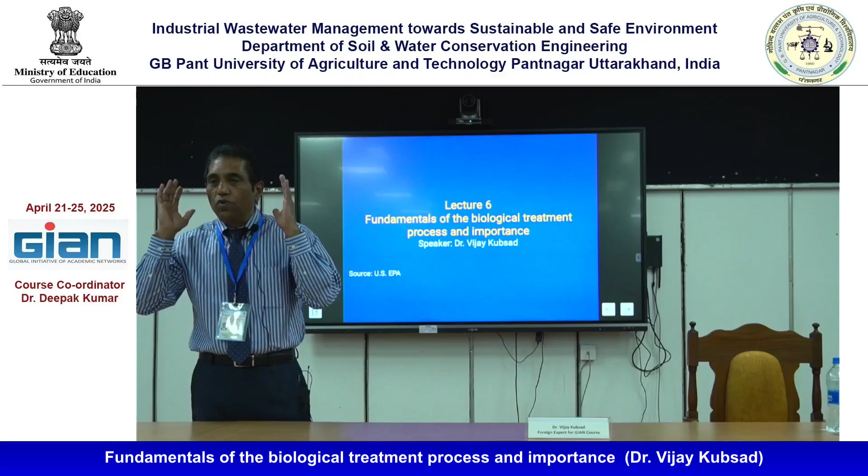You work with different groups of people: consultants, regulators, industry, public participation. See how many components you are working with together. That is how this course has been built. Whole, then part by part we are going, so that you will have a complete understanding of what you have studied, how it is done in all directions. That is the intent.

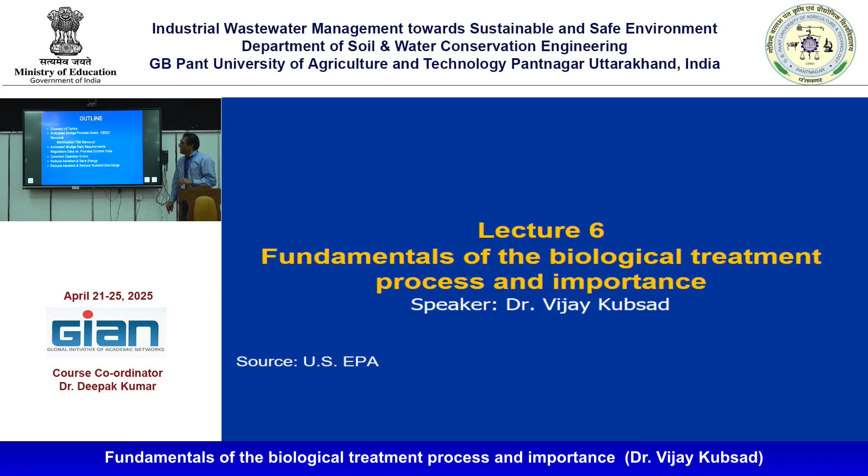Earlier I used to mention biological treatment. That is what we are studying: fundamentals of the biological treatment process and its importance. Outline. I have given you the glossary terms. Please read them. They are in soft form. I wanted to give you hard copies, but we have to save some trees also. If you read, that is useful. It should not just remain in your computer, right?

Those are the terms in the field of wastewater treatment, in the field of environment. You should know what they mean. If I say BOD, you should understand what it is. That is the fundamentals. That is why I say BOD, but sometimes I explain. But there are several other terms also.

There is daily discharge, monitoring, what is pH, what is nitrate, what is nitrogen, what is ammonia, what are the limits, what do you mean by limit, what do you mean by a wastewater treatment plant, what are the pollutants of concern, everything is there. There may be some more, but the major ones are there, so we read that. So the activated sludge process,

carbonaceous BOD removal, nitrification, TSS removal, activated sludge data requirements, regulatory data, process control data, common operator errors. Operators are very important, the people who manage that system. That is why they have to be certified. Just by experience, they have been doing some things for many years.

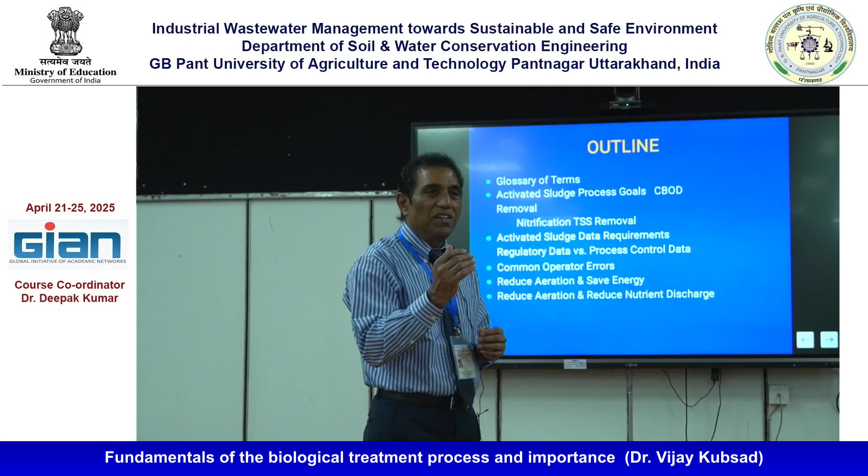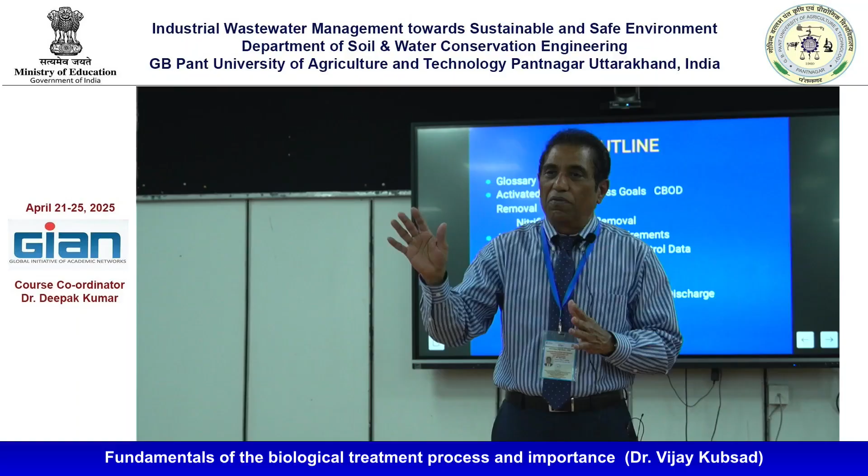In the design, you will assume certain parameters, but not exactly the same. There may be a little variation. That is why you have to make sure that things are working in the field. It needs a little tuning. So don't believe that this is different and that is different and just walk away from it. No, it will work. So you should make sure that these things are working in the field.

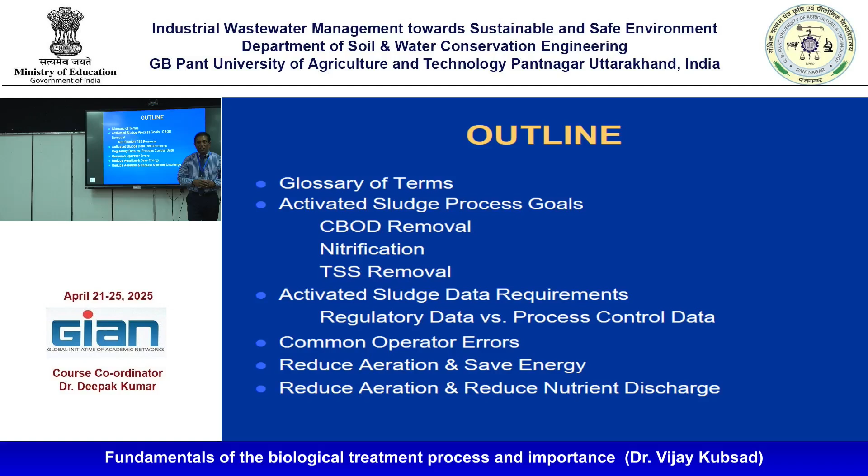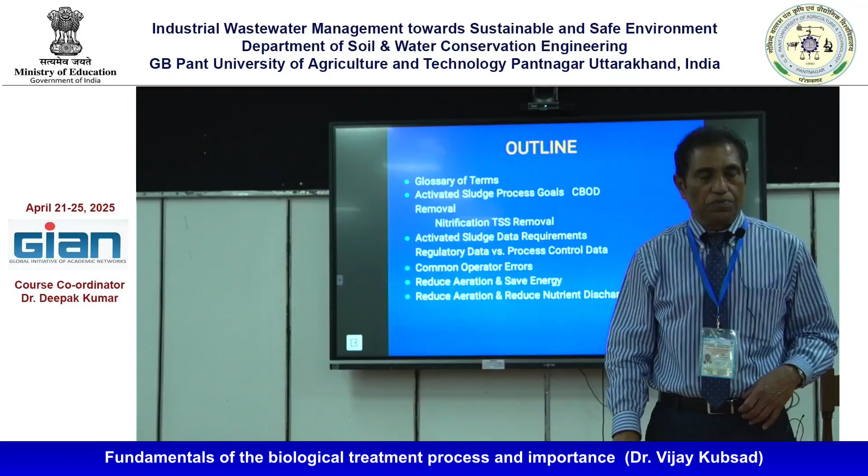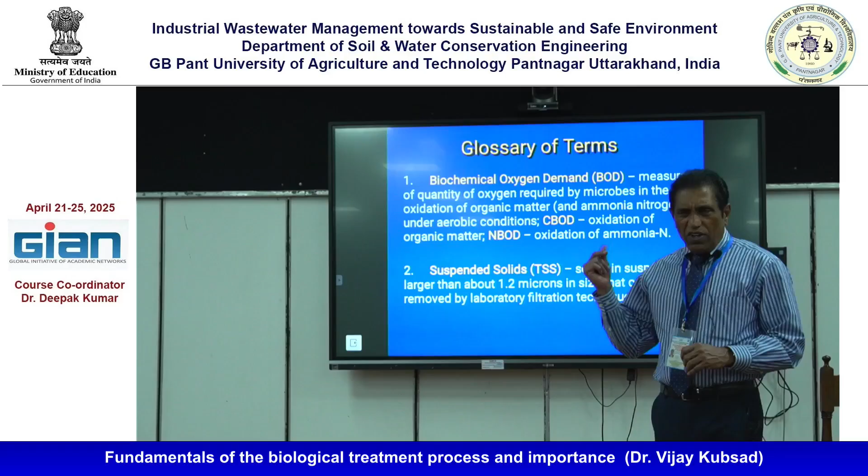If you know this, you can save energy. Energy is very important. A lot of energy is required in the treatment plants. We will come across different types of biological treatment systems. We use a lot of energy in the treatment system. So I will go a little bit quickly through the glossary terms commonly used in biological treatment. Why are biological treatment systems still so popular today?

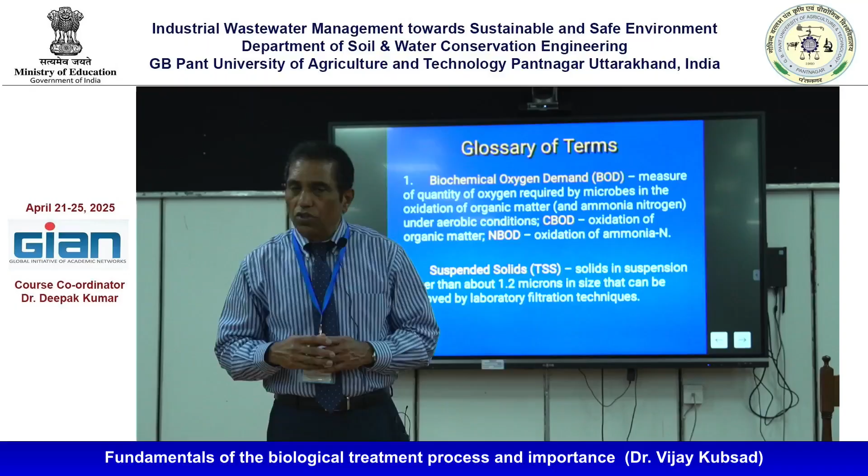Because it is done by bacteria, microorganisms, right? Microorganisms do a very great job for people. They convert unstable organic compounds into stable compounds, into water and carbon dioxide, reducing the organic loading, right? So they do an important job. So you should know what organic matter is, how much is reduced, what aerobic treatment is, what anaerobic treatment is. I have given it in the glossary. I just wanted to brief a little bit about that.

BOD is the quantity of oxygen required by microbes in the oxidation of organic matter under aerobic conditions. Aerobic means in the presence of oxygen, anaerobic in the absence of oxygen. What is the difference?

Detention times are different, based on oxygen supply. There are bacteria which are more efficient in aerobic conditions, and there are bacteria who can work in the absence of oxygen also. That is what your digesters are.

So then suspended solids - solids in suspension larger than about 1.2 microns in size that can be removed by laboratory filtration techniques.

If you are telling someone BOD is this, suspended solids are this, how will you define it for a third person? That is why you should have understanding for yourself when you are making a statement.

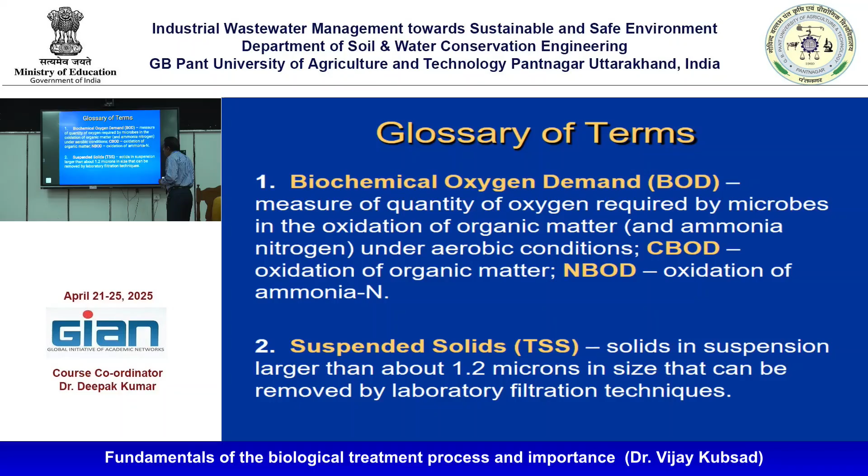Then biomass, living biological matter - I'll go a little quick on that. Activated sludge process is a biological wastewater treatment process in which a mixture of wastewater and activated sludge. Why is it called active?

Because what you do in the activated sludge - we will go further, you will understand much better - when the sludge is there, 2%, 3% of the sludge, 10% of the sludge is again recycled. You want to keep it active sludge. That is why it is called activated sludge process.

Because what happens in the aeration tank, organic matter is converted into stable compounds. And in the next clarifier, these bacteria are removed as suspended solids. Then part of that you recirculate to the oxidation, to the system, because they are removed as suspended solids.

See how important work they do, in a fraction of a second, right?

So activated sludge is aerated in the reactor basin, in the aeration tank. Biomass is settled in the final clarifier, with most biomass returned to the aeration tank, while some biomass is wasted.

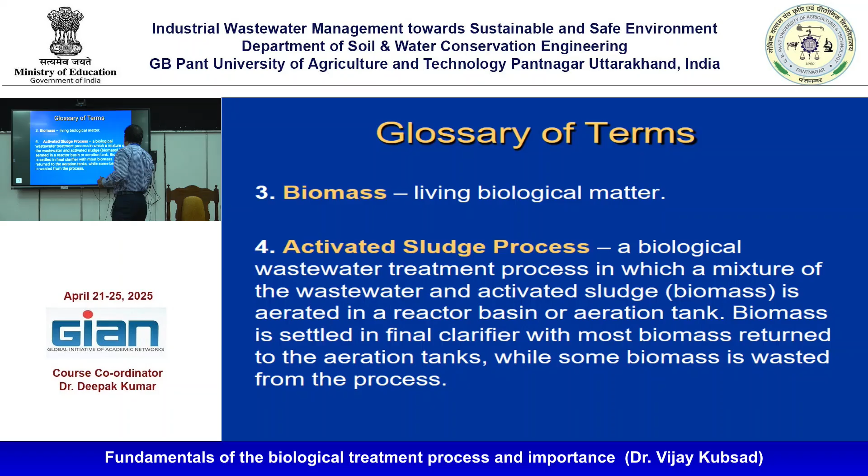Then return activated sludge - settled activated sludge that is returned to mix with the raw or primary settled waste. Then waste activated sludge - the quantity of microbial solids that has to be wasted from the system at the rate it is produced, same as the excess biomass.

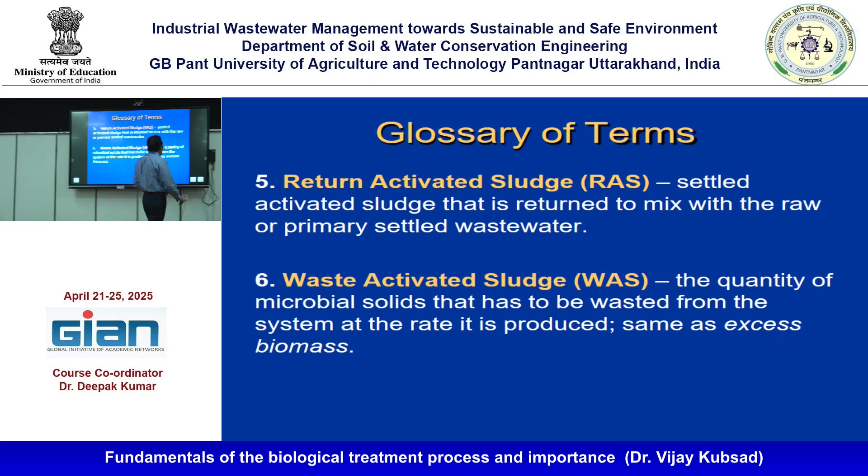Okay, so we are entering into the treatment system. I'm giving some basic understanding about the terms frequently used in the system.

Sludge age - the average time the microbial cell remains in activated sludge, same as mean cell residence time and solid retention time. Bacteria also has an age, right? That is why you need recirculation.

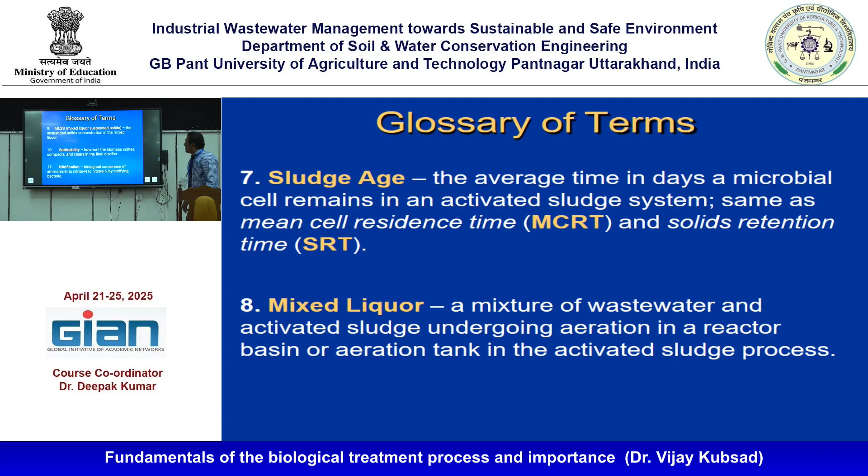Mixed liquor - a mixture of wastewater and activated sludge undergoing aeration in the reactor basin, aeration tank, in activated sludge process. MLSS, mixed liquor suspended solids - the suspended solids concentration in the mixed liquor.

Settleability - how well the biomass settles, compacts, clears in the final clarifier. That is important, it has to be settled. That is why you give sufficient retention time so that they can settle.

Nitrification - biological conversion of ammonia nitrogen to nitrite by nitrifying bacteria. Nitrite is unstable, it is converted into nitrate. The reaction is done. If I say there is no organic compound, what does that mean?

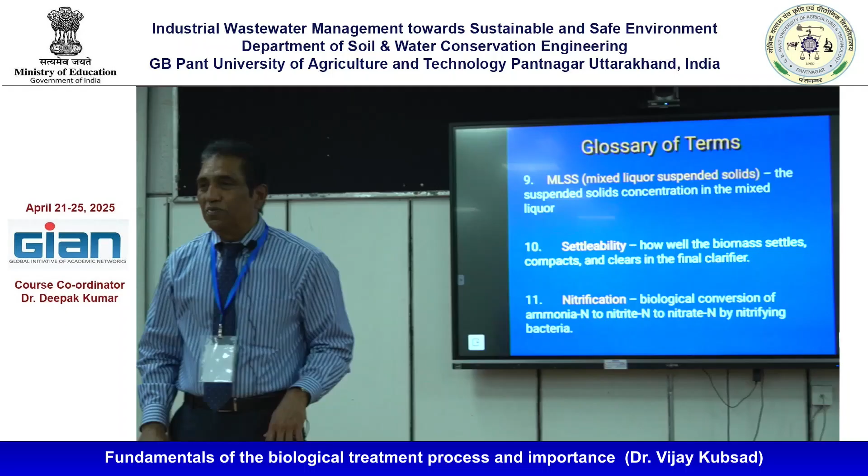The reaction starts as soon as the wastewater comes out of your residence, because it has bacteria. When all the organic matter is converted into water and carbon dioxide, the reaction stops. That's why when you go near a wastewater treatment plant, it has some odor.

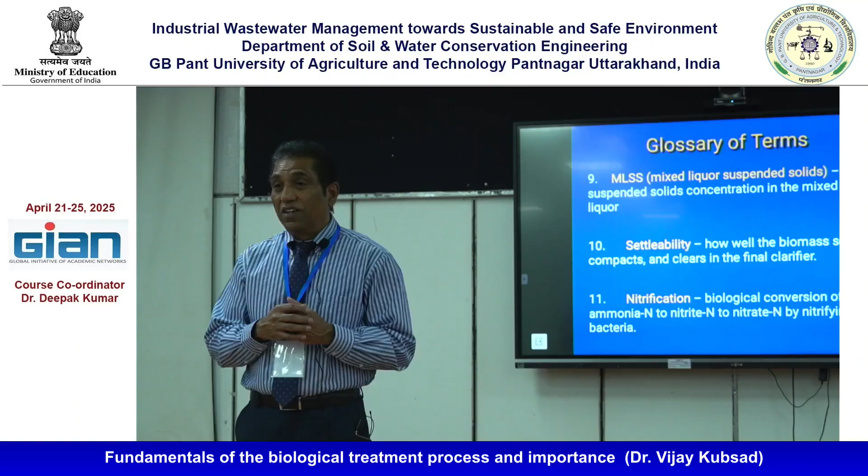You feel that. That's why people working in the field of wastewater, cleaning the waste which is produced, they are great people. All the time they are there taking care of the stuff which is produced. They are a very important component of our whole system. They do a great job.

It is very easy to work on the table, work nicely, and go home. Like people, you see this waste is treated and made compatible, then discharged. That's why you see who are the stakeholders, how many people are involved in order to make the whole treatment system a good environment. If it is good, everybody feels happy. But you have to work towards it - when somebody shows pictures of other places, so nicely maintained, some people have worked for that. People who are there have worked for that. The same should be here. When everything is good, people like it.

Construction also - a lot of people work and make a good, big, nice house, and they go away. They will forget. The people who are responsible for making it are important.

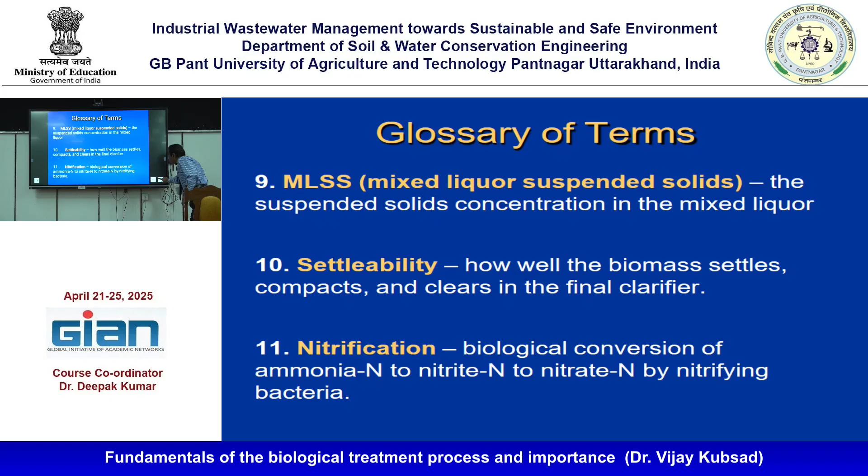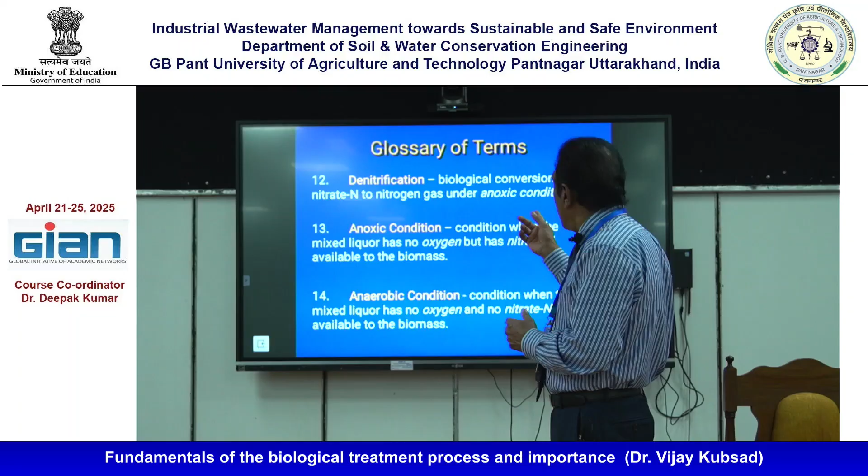We should always have gratitude to them. That is nitrification and denitrification, in the sense biological conversion from nitrate to nitrogen gas. What happens? The reverse. Nitrification and denitrification go hand in hand, and nitrate is converted into nitrite, and then nitrogen gas goes out of the system.

Anoxic condition is a condition that exists between aerobic and anaerobic. That is why we want to make sure the wastewater is always in continuous motion. Otherwise, what happens? We want to create an aerobic situation. If the sludge settles all the time, it creates an anaerobic condition. That's why we want to make sure the aerobic system is working. So anoxic condition is in between.

Why are there three conditions here - aerobic, anoxic, and anaerobic? Different bacteria exist in those conditions. How will we know that? You can find out what kind of bacteria are available. You might have heard of heterotrophic bacteria, filamentous bacteria, fungi, many bacteria. Different conditions and situations mean different bacteria with different capacity.

So, anaerobic conditions are when the mixed liquor has no oxygen. There is also a provision - if oxygen is not there, you can still treat it. If it has high organic content, what do we do? We treat it in an anaerobic situation to reduce a lot of BOD, then put it to aerobic conditions - different combinations and designs depending on the type of wastewater. That's why I was telling you it depends on the influent concentration. Accordingly, we design. Domestic wastewater has a BOD around 300, 400, 500.

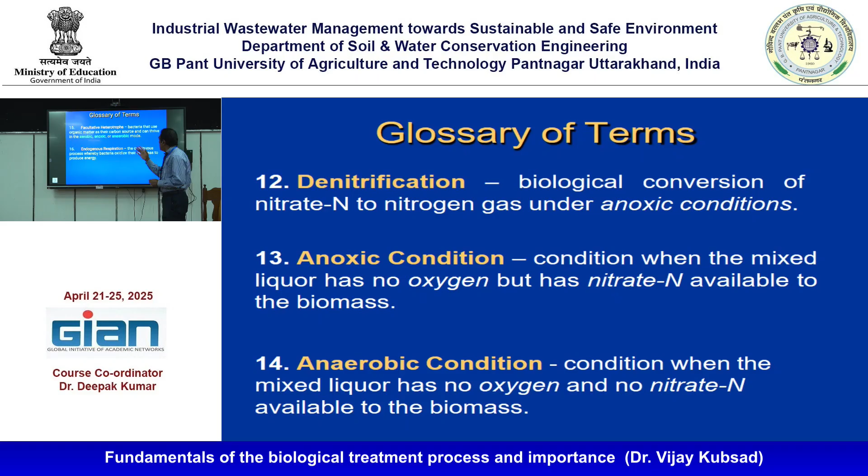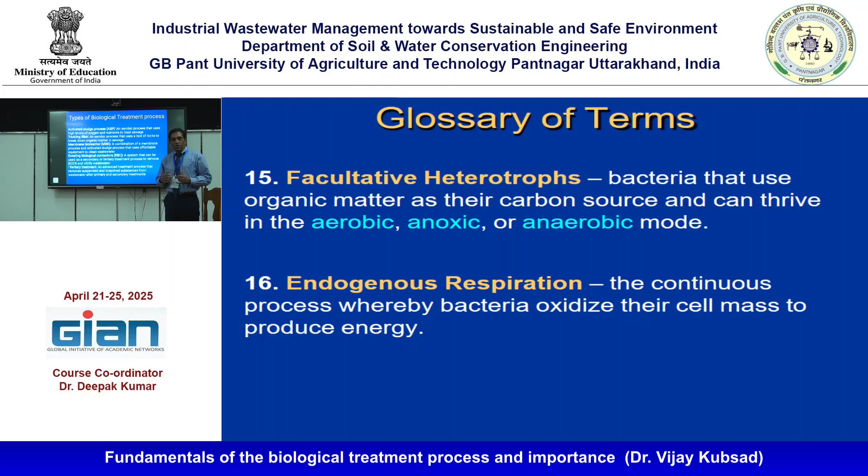So in different conditions, accordingly designed. Facultative heterotrophs are bacteria that use organic matter as their carbon source and can thrive in aerobic, anoxic, and anaerobic modes - different. Endogenous respiration is the continuous process whereby bacteria oxidize their cell mass to produce energy. What it does: two-thirds of the energy is used to convert organic matter into a stable compound, and approximately one-third is used for their reproduction. The number of bacteria will go on increasing.

That is how your food to microorganisms ratio works. When the food is reduced, the number of microorganisms is more. What happens if food is not available? Microorganism deterioration takes place - they are removed in the next treatment system as suspended solids. See how phenomenal it is - they do a tremendous job removing the waste produced, and in the next stage they are removed as suspended solids and disposed of.

So that is why bacteria play a very important role. They reduce the toxic substance in a fraction of a second, and then they are removed from the system. Then new bacteria come and take over. So this is how it is. Types of biological treatment: activated sludge process - still popular.

It's an aerobic process that uses a high level of oxygen and nutrients to treat sewage. Trickling filter is an aerobic process that uses a bed of rock to break down organic matter - this is called attached growth. There is a media, wastewater goes into it, there's a thin layer, and then the organic matter is converted to a stable compound - attached growth. So attached growth media is there and wastewater is passed through.

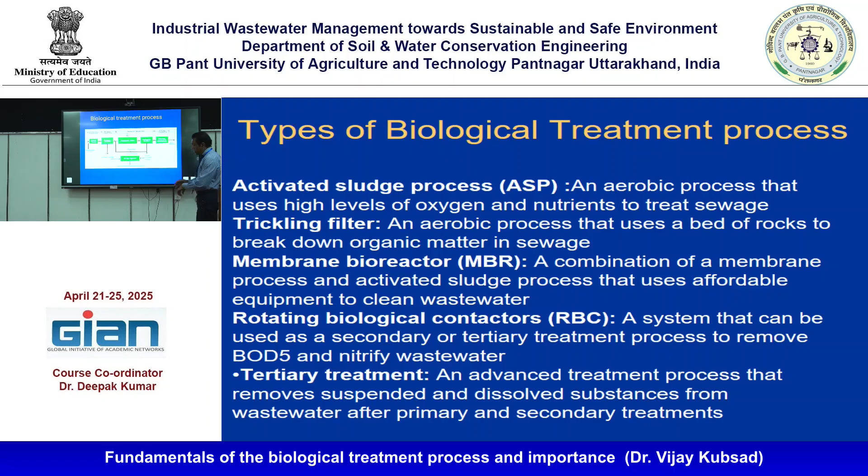This is how the system works: preliminary treatment, primary clarifier, secondary treatment, aeration tank, secondary clarifier, nutrient removal and disinfection, and final effluent.

Disinfection is also needed sometimes. You also saw during the visit that they used ultraviolet treatment for disinfection. Or you can use other methods.

When discharging to the river, we try to avoid chlorination. Today, ultraviolet is the best method if you are discharging to a river or stream. If the residual chlorine content is high, it may affect fish growth and fish movement.

That's why we want to make sure of this. When you use chlorine as a disinfectant, in the case of water supply, we use chlorine as a disinfectant in drinking water.

What happens is, you treat the water at some place, then put it into a distribution system. Before it reaches the consumer, it should not get contaminated. That's why we keep a residual chlorine of about 0.5 mg per liter, or 0.2 to 0.5 mg per liter, so that before it reaches the consumer, any contaminant in the system is taken care of.

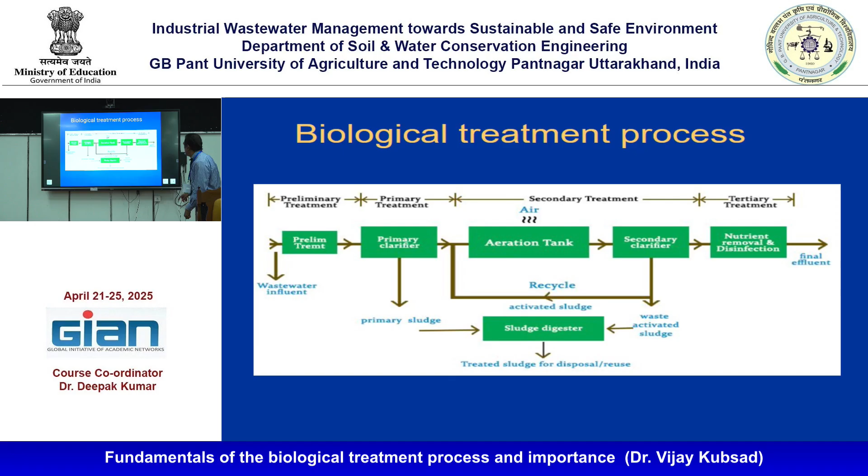So you can see the aerators, how they are placed. I have taken some pictures of the built system. That is how you design it: what is the volume of the wastewater in the tank and how much oxygen is required. That is a good balance you should understand. They are not randomly fixed somewhere. You should make sure that each corner, the wastewater and bacteria all get the right oxygen in order to reduce the organic compounds present in the water.

So these are the areas. So wastewater, you can see the pumps here all the time. You should have a standby. If that fails, you should have a standby. You don't have a choice there, because wastewater treatment is a continuous process. If it fails, what happens? The whole system, you have to have a bypass sometimes. For this very purpose, we have one set of standbys and another set of standbys.

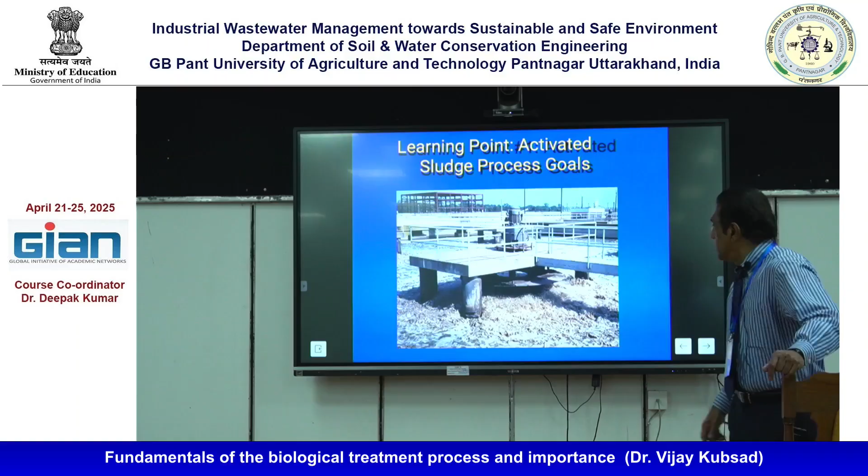Then a biological reactor, clarifier, and then return of sludge. That's why it is called the activated sludge process. Return of activated sludge is recycled back to the biological reactor.

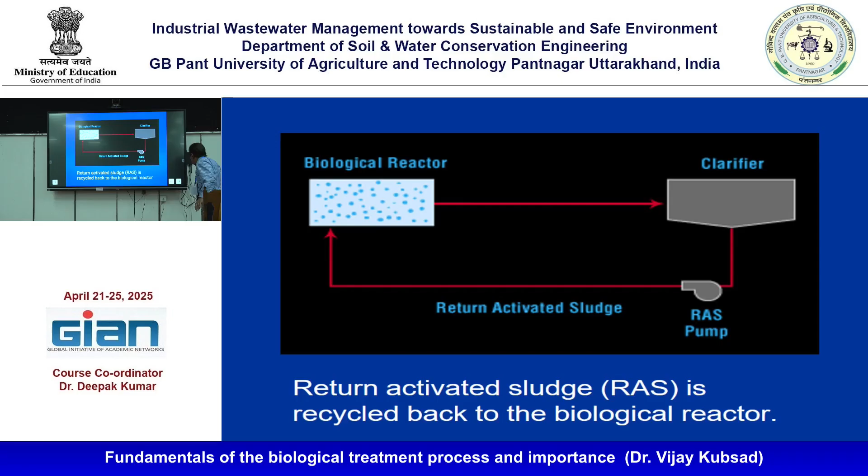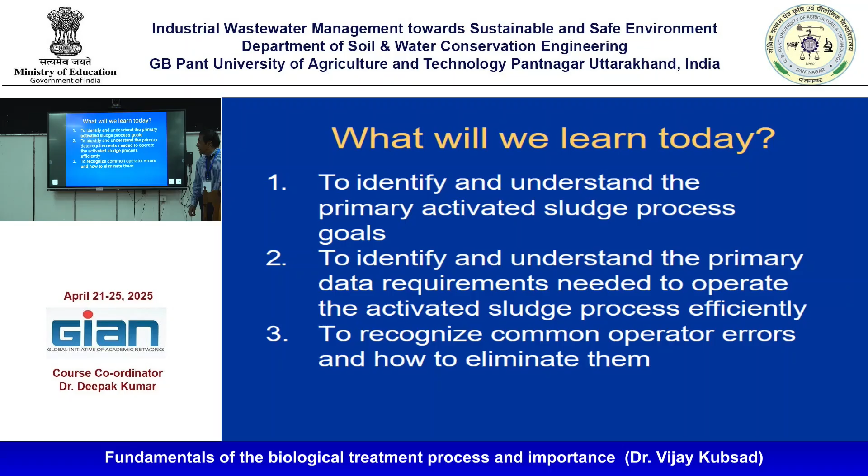Reduce aeration to achieve energy and money saving. That is important - no need to put something extra in order to become efficient if it is not useful. Because if you put an aerator running continuously 24 hours, and you are putting even 10%, 50% more, what happens? It's a waste, it needs a lot of energy. If you are putting under what's needed, treatment won't take place, and untreated wastewater will result. So that's why it should be appropriate - that is what is called proper design.

So reduce aeration to decrease the nutrient loading discharged to the receiving water. This helps us understand the activated sludge process better.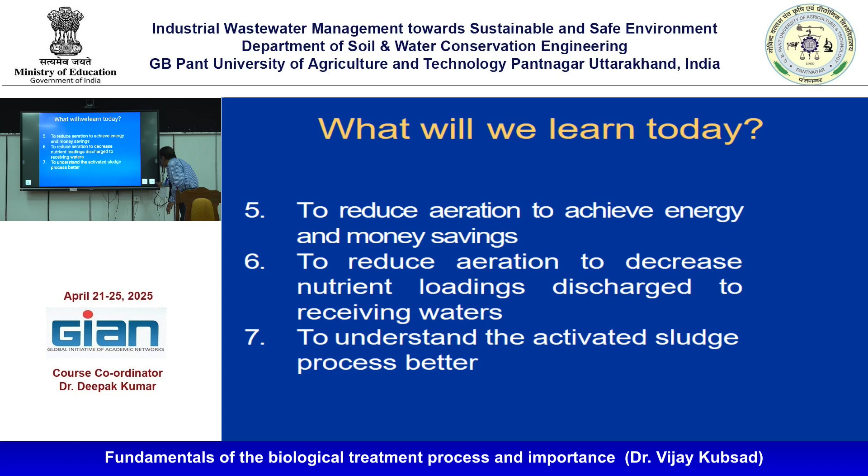You will have online flow measurements today, so you can monitor it well. You can have an online system where a person can see how the wastewater treatment is progressing. pH is also very important - but what happens if there is a variation in the pH? It will affect the bacterial growth, and the treatment will get upset.

How will we find out if you need appropriate pH? You should have measurements. That's why I say that first, when I go for a visit, I check whether you guys have calibrated your pH instruments or not. If it is not calibrated, it may read 12 when it's actually 10, or 10 when it's actually 8. So these are simple things, but you should have the mindset of what to check - that is important.

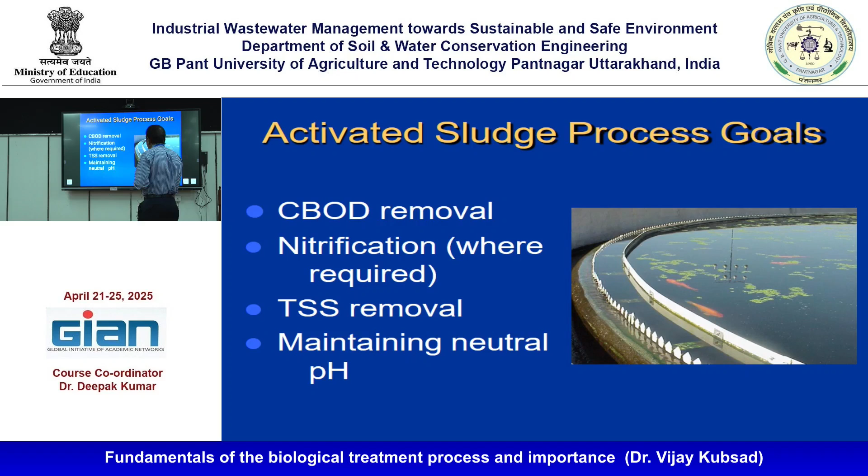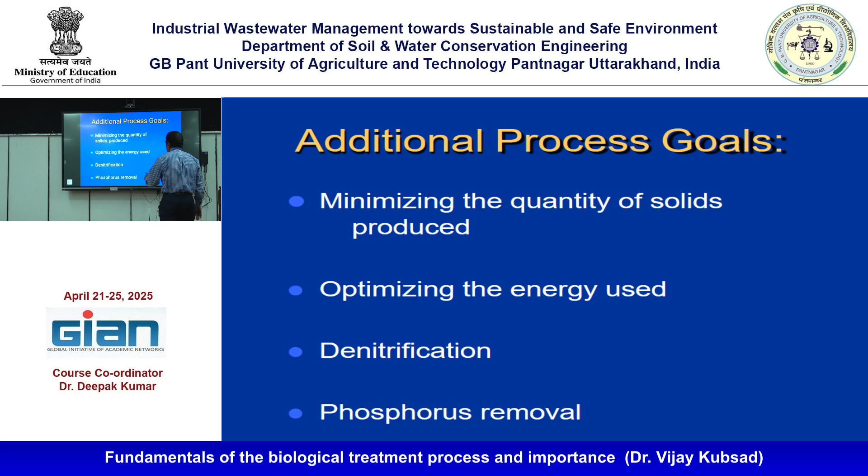Minimize the quantity of solids produced to optimize energy, denitrification, and phosphorus removal. For phosphorus removal, you should see how much phosphorus the wastewater consists of. If you are just removing other things and leaving phosphorus in the effluent, what will happen? Algae growth and such will start taking place. So that is why it is important to maintain phosphorus removal also.

Successful activated sludge process performance is judged by the effluent quality. How will we judge whether the treatment is working? You will see the effluent quality all the time - measure it and then use it for other purposes. If you are not measuring it properly, and you discharge it or use it for other purposes, you are creating another issue. First, you are not doing this right, and you are giving rise to another issue.

Achieve excellent effluent quality while achieving our process goals, minimizing energy use using plant equipment efficiently. You should save energy, have good effluent quality, and efficient equipment. These are important - if you are using old equipment that takes large energy, you don't want that; first understand what is required. I remember working on one project, long back, where for cooling towers, they were using seawater as cooling tower water to reduce the temperature, because water is very important.

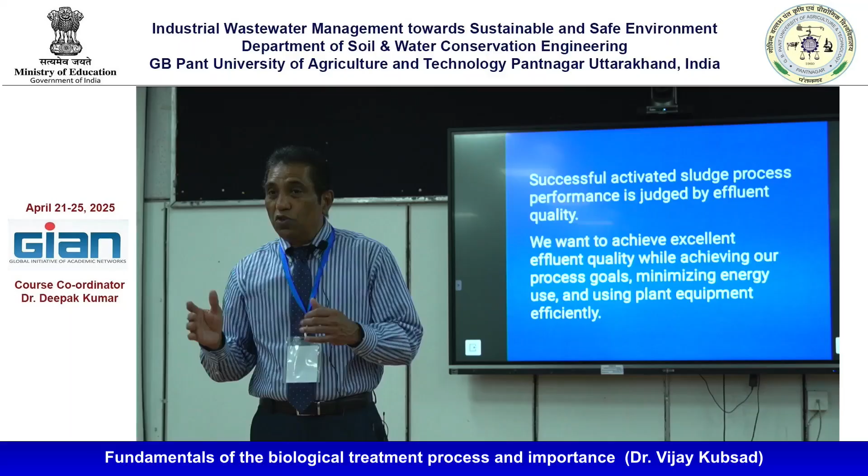See how much the volume of water is reduced. You did a great job bringing the sewage, treating it, and using it for your purpose—what a big reduction.

In a once-through system, you have to pull a lot of water and use a lot of energy bringing that water to your cooling system, passing it only once—it's a once-through system requiring 17 times more water than needed.

Compared to taking seawater, now it's 17 times less energy. They started saving a lot of money on energy, and the municipality was happy too, right?

So this is how you can see the different ways of using technology and how it can be done, right?

So both are happy—this is possible. These refineries and similar industries use a lot of water for their cooling towers.

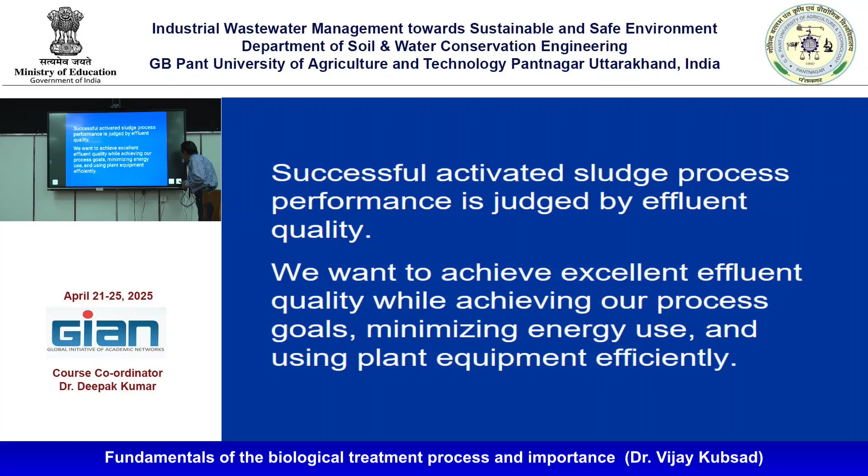Conventional activated sludge processes are primarily designed to remove CBOD, meaning carbonaceous BOD, and TSS from the waste.

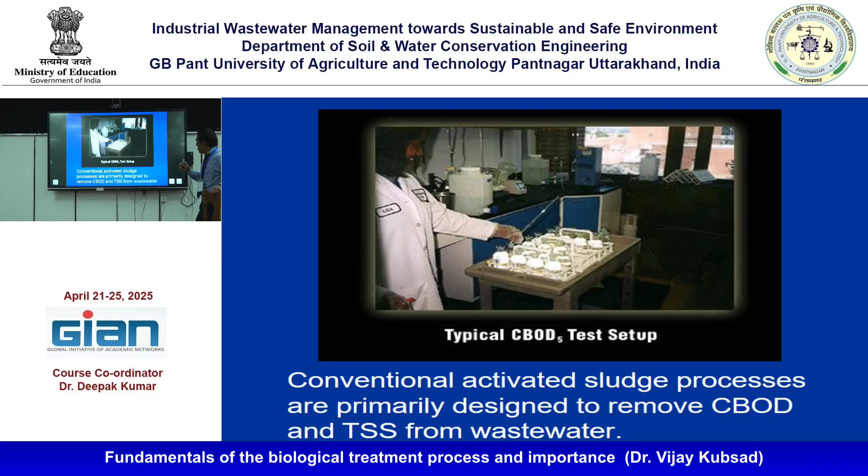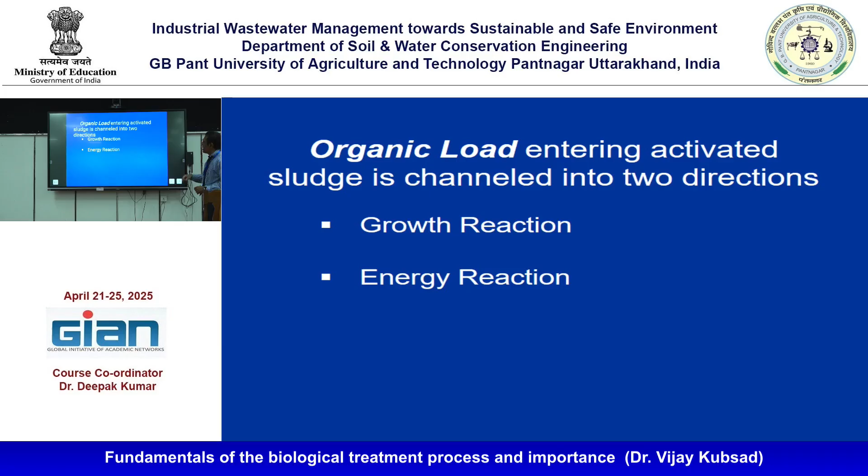Organic loading entering the activated sludge is channeled into two directions: growth reaction and energy. In the growth reaction, organic nutrients produce new biomass cells.

By the growth reaction, biomass is produced as a result of consuming organic matter. That is what I said.

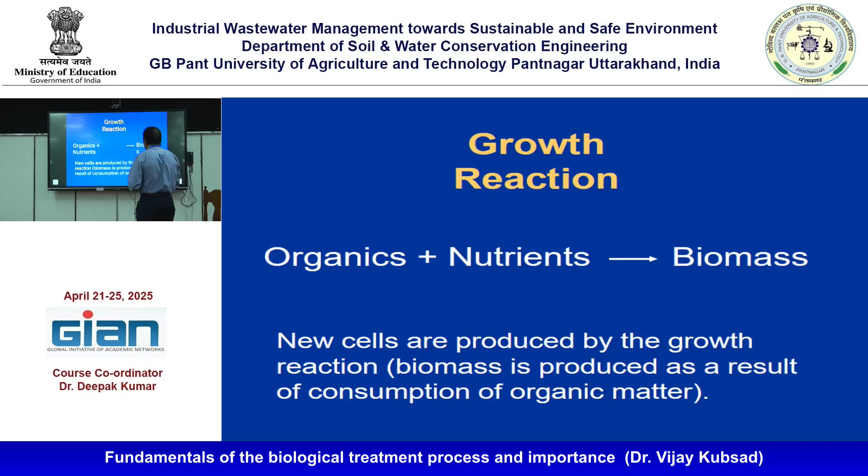So bacteria use some energy for their own reproduction, and they also do a great job for humankind—they reduce the organic matter to stable compounds like carbon dioxide and other byproducts.

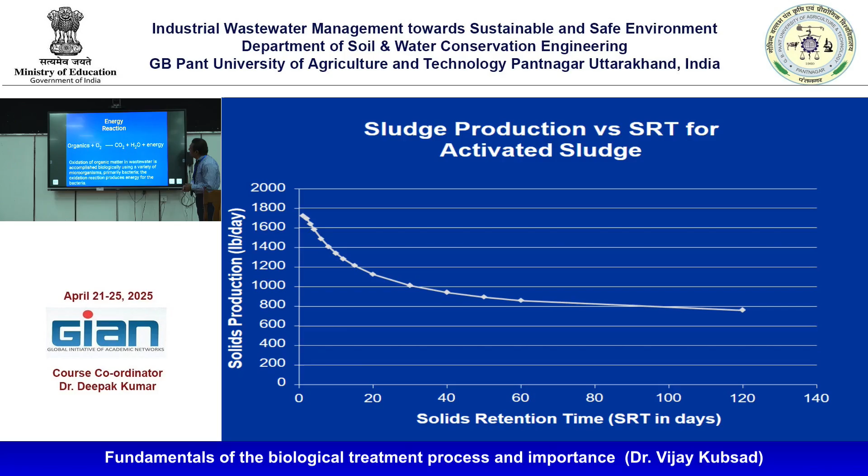Sludge production—solids produced per day, solid retention time—organics plus oxygen convert to carbon dioxide, water, and energy.

Oxidation of organic matter in wastewater is accomplished biologically using a variety of microorganisms. Primarily bacteria—the oxidation reaction produces energy for the bacteria.

We use heterotrophic bacteria; they are very efficient in treating wastewater.

But if there are pollutants, what do we do? We try to acclimatize these bacteria to remove specific compounds if they are toxic.

Even cyanide—certain industries, fuel industries, refineries produce it. We're happy when gas prices go down, right? But these processes also produce contaminants like cyanide.

So there are bacteria which reduce that too. We try to acclimatize them—people working in biological treatment plants know how to do this. There is a group of heterotrophic bacteria.

They've done that, so that's why I'm telling you—people are very demanding, right? They don't leave even bacteria alone.

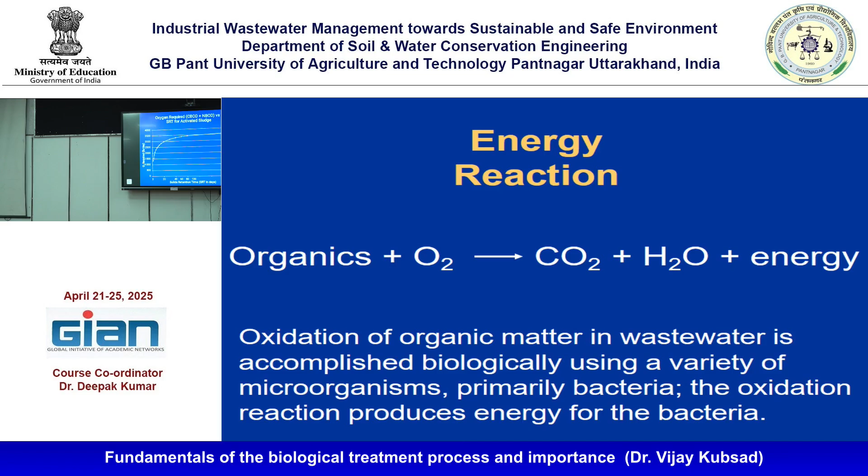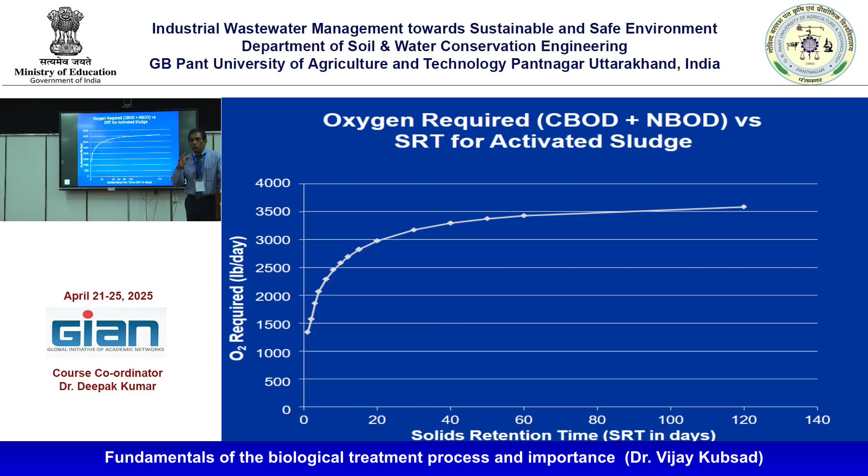So oxygen requirement, I said, is very important. You should make sure that the right amount of oxygen is available for the bacteria to reduce organic compounds. Then there are some numericals about nitrification, and yesterday you saw one video of how that takes place. I will go a little faster here. You have seen how nitrification and denitrification go hand in hand simultaneously.

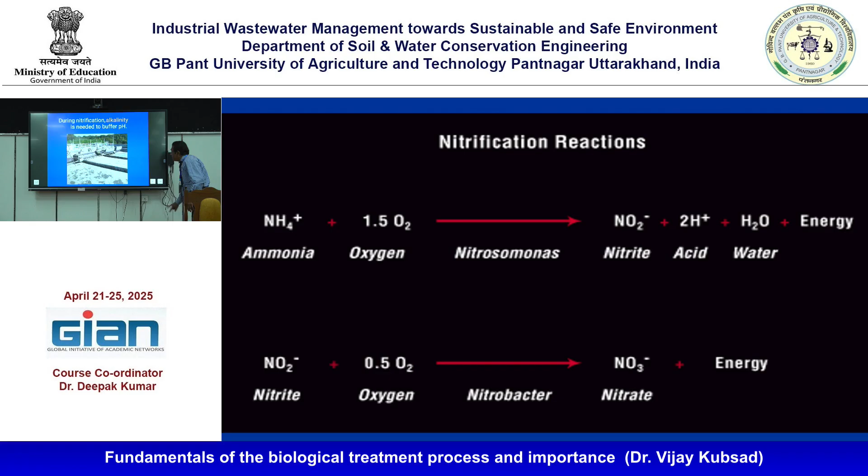What happens? Ammonia is converted into nitrite, then nitrate. In the denitrification process, what happens? Nitrate is converted into nitrogen gas. That is how it is treated. During nitrification, alkalinity is needed to buffer the pH. Alkalinity in the sense you need a higher pH, right?

Any questions on that? So what you learned is in the biological system, what it consists of, what are the terms and conditions, how the wastewater enters the treatment system, and how you are taking care of the general domestic wastewater. The BOD may be higher or lower, doesn't matter. In the pre-treatment world, we use the industrial wastewater. The industrial wastewater produced has a low BOD. So we take advantage of that.

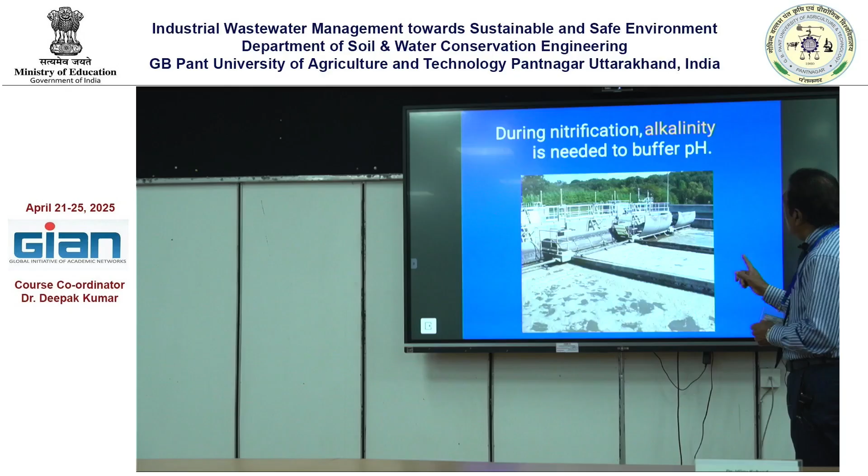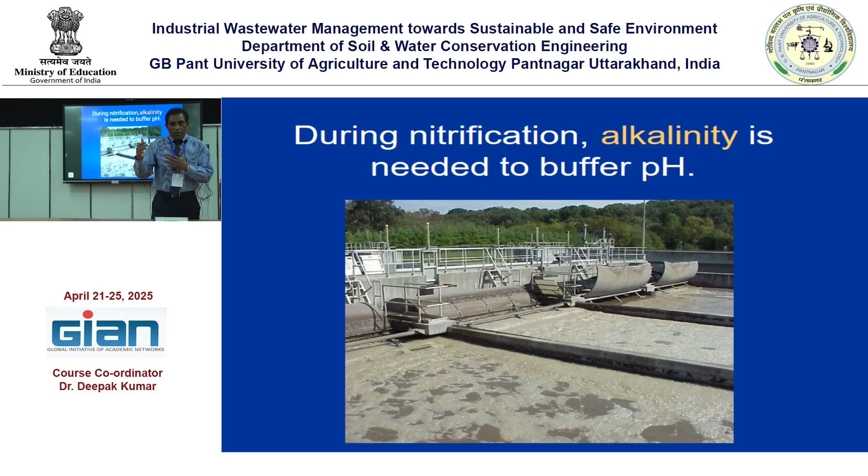If you see here, a little back, with the nitrification we do the denitrification. That is how we do it. In the case of the activated sludge process also, industrial wastewater has less BOD and domestic wastewater has BOD. So we want to mix them and take advantage of that.

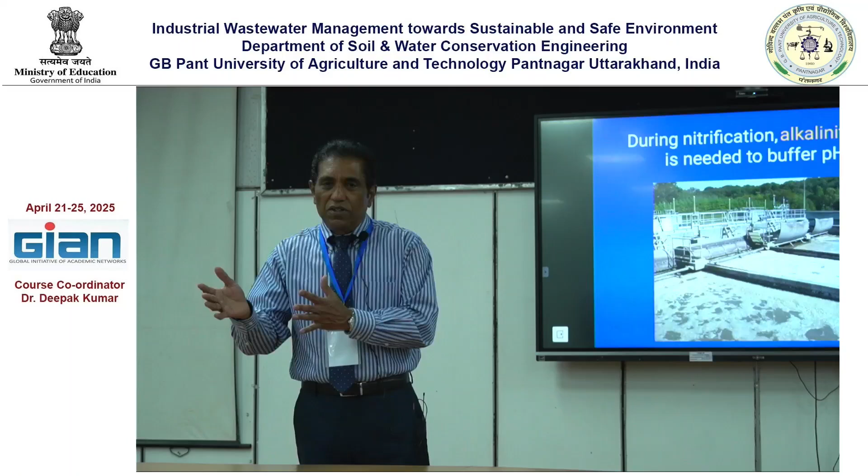But that is why in the pre-treatment world we tell the industry the pollutant of concern must be removed. If they are producing a toxic, if it is a categorical industry, they just can't discharge everything and mix it with the domestic wastewater. No. That is what our system is. We will treat partially. You pay according to the amount you are discharging. That is how the agreement works.

With different industries, you can't take all the wastewater, mix it with the domestic, and treat it. You analyze. They are called tributary industries. When they are discharging, we make sure that if it is a metal industry, the toxic substance is removed. If it is a food industry, it has a lot of suspended solids. You just can't discharge. You have seen the example in the case studies, right? They produce a lot of suspended solids and high BOD.

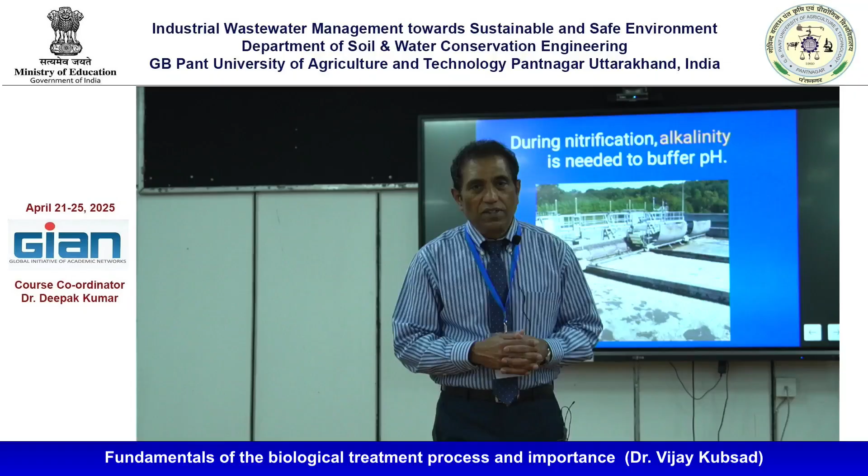They are discharging it to the domestic wastewater treatment plant, the city's treatment plant. It has a high BOD. If it is more than 1000 milligrams, you just can't discharge. You cannot overload. Food processing industries have a lot of suspended solids and a high BOD also. So in that case, they say reduce the suspended solids concentration to the level of 300 or 200, then you discharge.

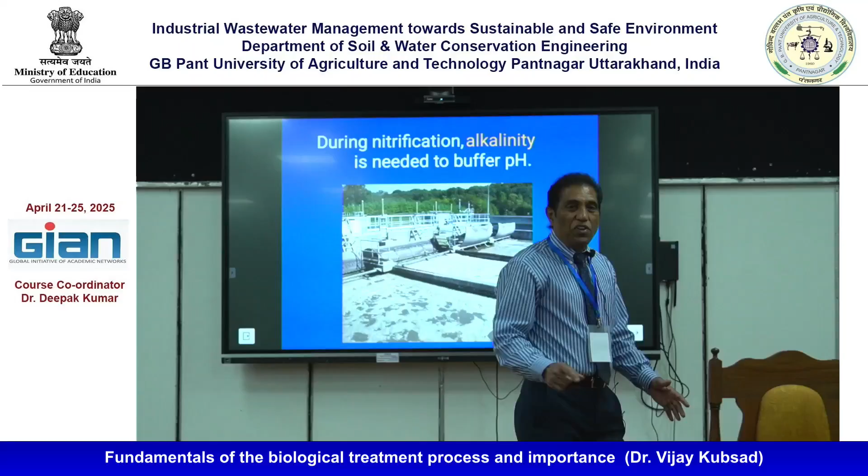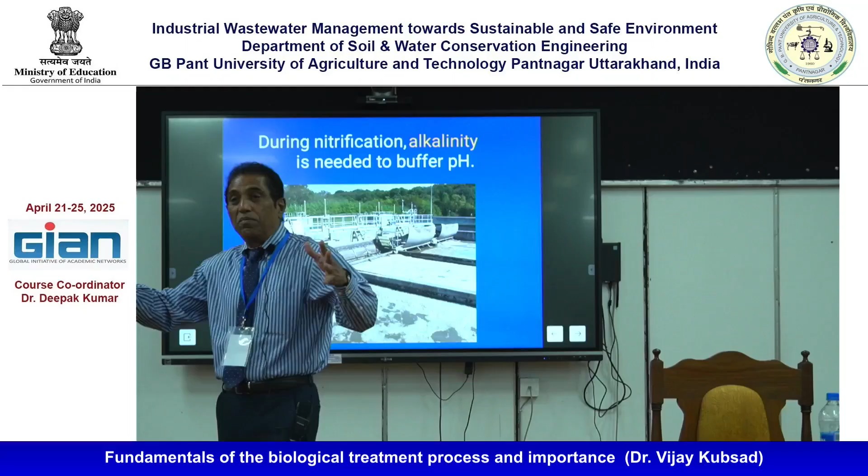So what they will do? They will build a big settling tank, a series of tanks. It may be geomembrane, because if they are producing a high volume of wastewater, you cannot ask them to have concrete tanks. If the volume is less, it is fine. That is why they use big acres together, the geomembrane, double lined; it is mandatory.

If it is industrial wastewater, it has to be double lined. So they do two, three big geomembrane ponds, connected to each other, and then the suspended solids settle down, reduce to a certain range, and then they discharge.

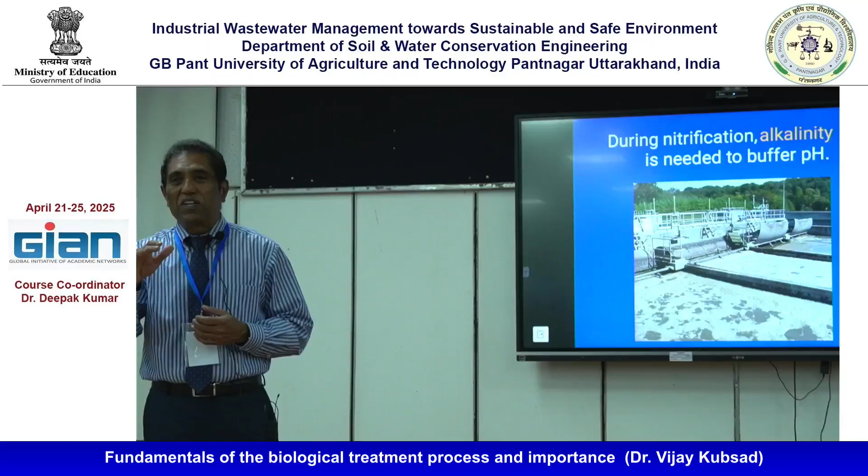If it is a high BOD, I said they have suspended solids at high concentration, high BOD also. So they put a DAF system. You have seen the DAF system there yesterday. They have a settling tank to remove the suspended solids, and also a DAF system where the oxygen is added so that the BOD is reduced to some extent. If it is 1000, you can reduce it to 800, 600, then they discharge. We will take the rest of that. So this is how the system works.

That is how you have to see what kind of industries are there, right? Then accordingly you will have to design a pre-treatment system, then discharge. In certain places where the number of industries is more, you cannot tell all the industries to do a pre-treatment and then discharge, we will take it. Sometimes it is not a possibility. That is why the city sometimes builds two different treatment plants.

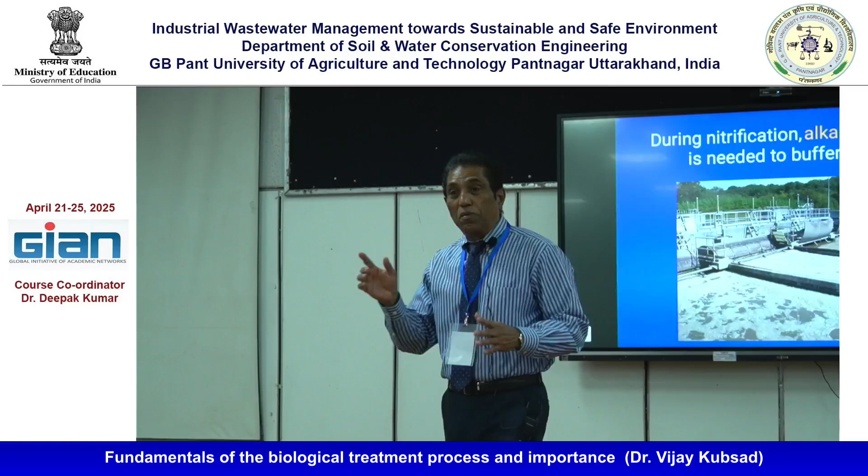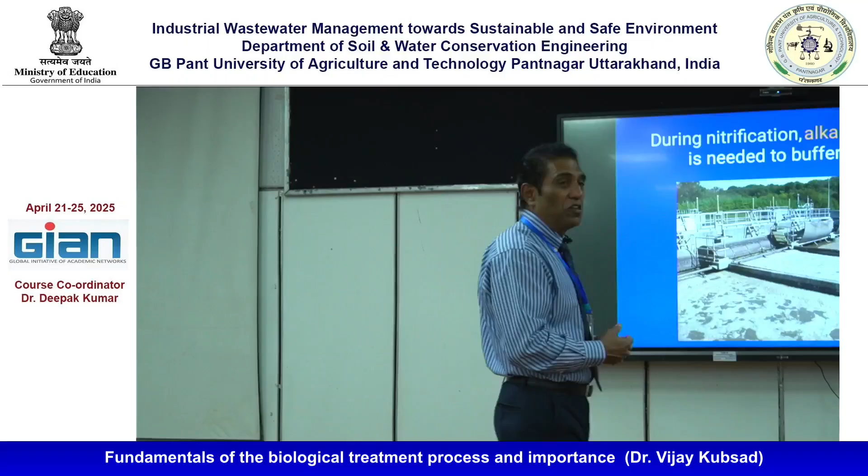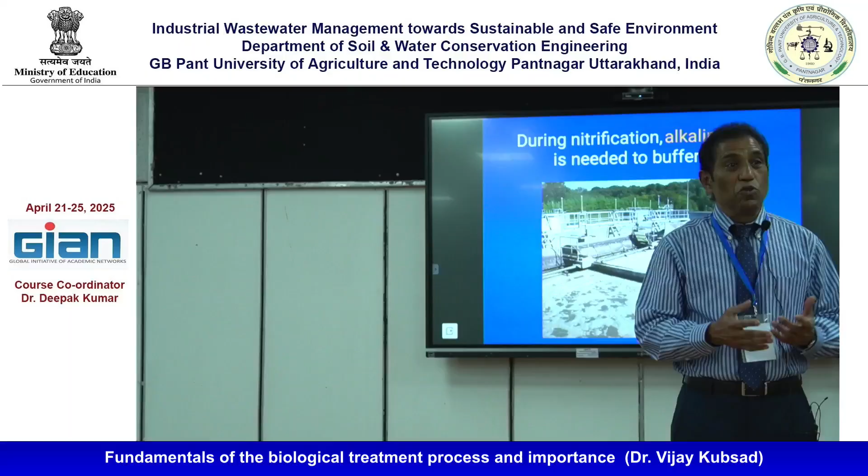One is domestic wastewater treatment, that is mandatory, that is called POTW, which is publicly owned. See, the name is publicly owned because people contribute. If anybody says the city sewage treatment plant, it means it is your own treatment plant, right? And nobody is taking care, right? That should not be there. And you do not know also. See, that is built with your own money. That's why they give the name, so the public should understand it is ours, not that the sewage treatment plant belongs to somebody else. So that is important. That is yours.

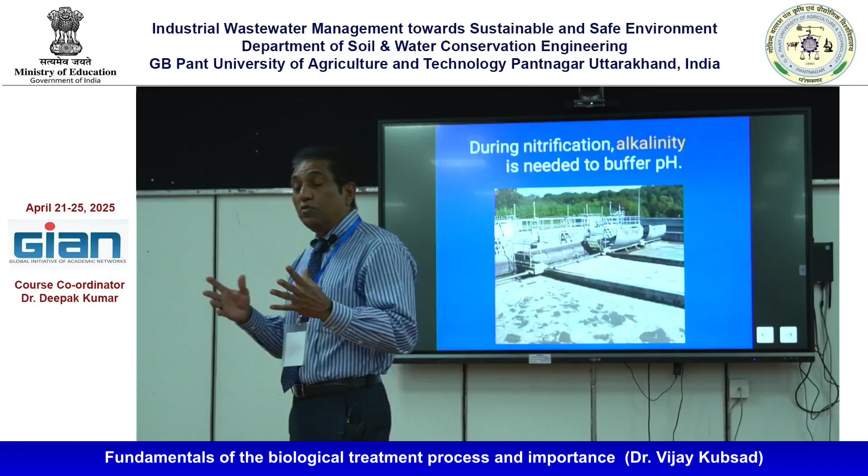So what they do is, if the number of industries is more, then they build a separate one specifically for industry. If 10 are there, we can put 7, 8 there and 2 here. That is how you should have an understanding. It depends upon the capacity. I have dealt with many industries where industry goes on expanding. If your city treatment plant remains at the same level, what happens? There is a problem.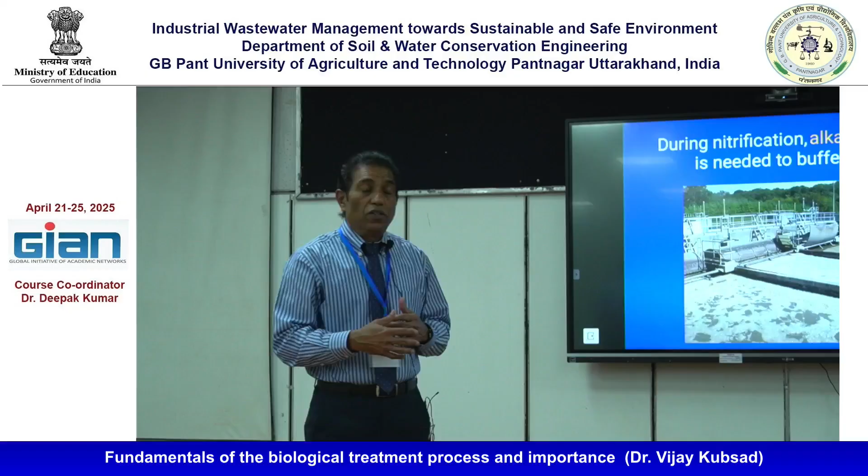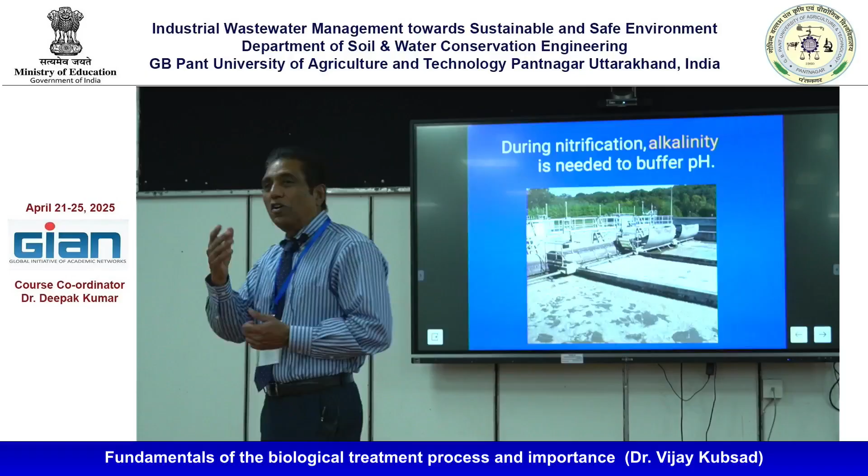So that is why the common effluent treatment plant concept came into existence. All small industries together build a common effluent treatment plant, then they discharge. And based on the volume and the concentration, and there are some management experts here who can work it out, based on the organic concentration and the flow, the cost is divided.

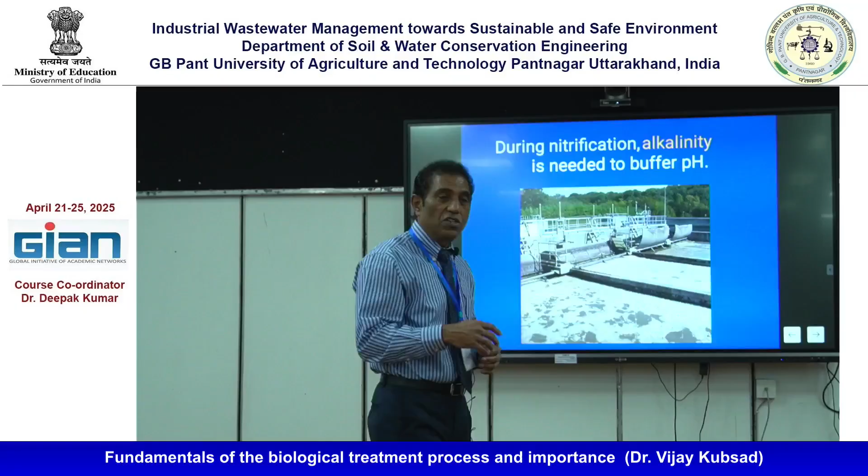So they will run it properly, because the stakeholders are there. Here public means the whole public, maybe millions of people, half a million, a quarter million. Industry giants will come together and build. Then they try to run it efficiently because they pay for it. They have to pay as per the concentration, as per the loading, the volume. So that is how this common effluent treatment concept comes.

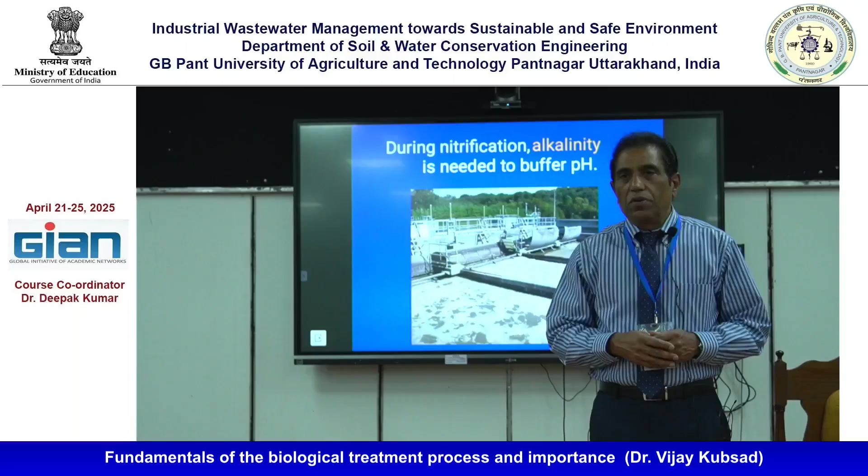But the problem is, if they are in the industrial zone, they can have efficient treatment. But if the industries are located at different places, suppose you have many small industries in the corners of the city, who will account for them? They will be discharging the wastewater to the sewer system, but it is still the responsibility of the city's treatment plant to treat it. So that is why nowadays they are trying to make industrial zones in a particular area and shift the industries existing in other areas.

If it is a big plant, they have that capability. They can build their own treatment plant, and they can also put a pipeline to discharge the wastewater, depending upon its quality, to the creek or to the river, or they can do land application. They have that much resource. So this is how they are trying to do it, but it takes time.

Now the new cities and towns are built with the concept that there is an industrial zone, a residential zone, public places and future expansion. This is what you have learned in your engineering schools. It has to be there, but at least the new areas should be like that. Then it is easier to plan.

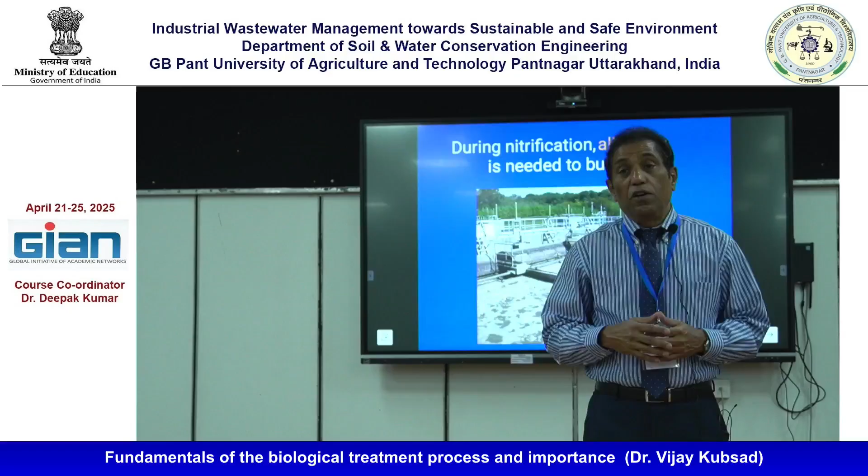And there are hospitals also, clinicals also. You have to make sure that the city has to make sure they are treating the waste coming out of that system, should be taken care of that. We have a program there for the cities. This time,

Okay, I have little 15 minutes time.

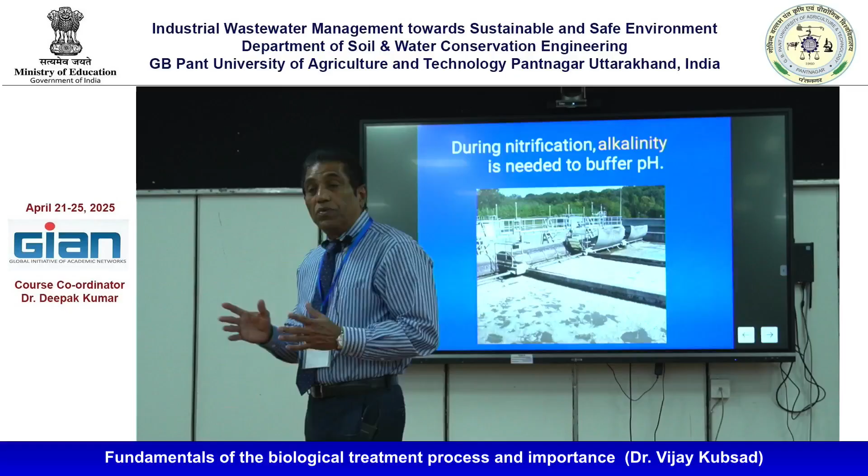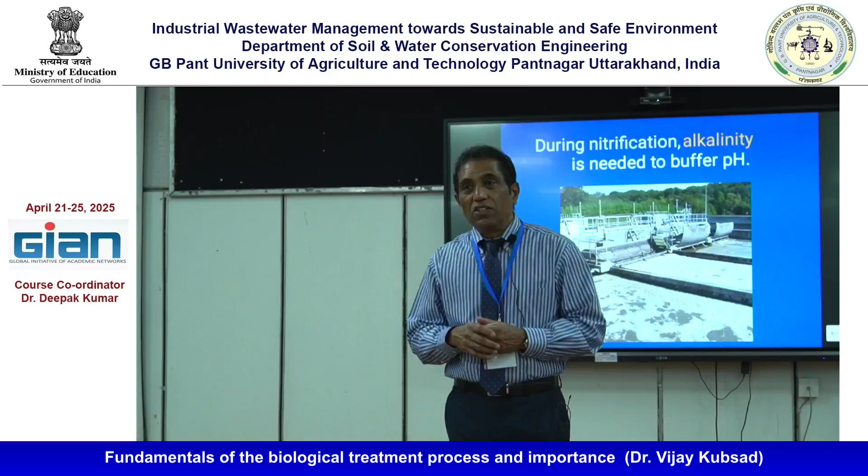So we have a program called the FOG program, where all the restaurants and the local entities come in under the scanners to remove oil and grease in the system. We have a dental program where the dental clinics, what they do, the amalgam which is coming out, that enters the sewer system also. They have to put an amalgam separator. We make sure that dental clinic has an amalgam separator.

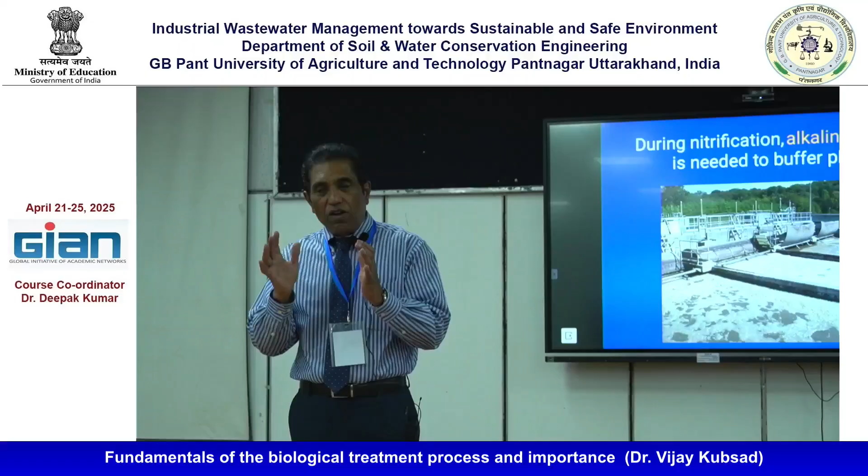So there is a one-time authorization. They have to build and have an amalgam separator. The wastewater which is coming out, it should pass through that. It has a good efficiency. We are making sure, we are training the cities, make sure that all the dental clinics are coming under that stand. I monitor all that, and we see that our people monitor them. So they have a responsibility of reporting.

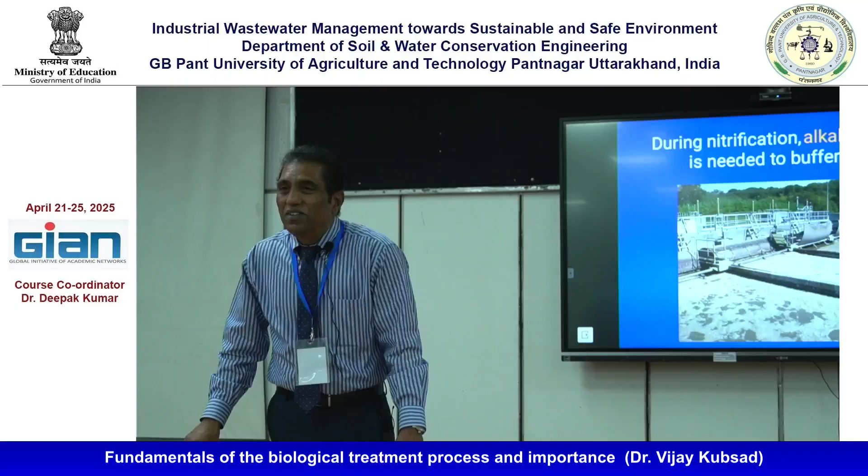They, what is it? Quantity is less. See, that is the important. Quantity is less, but if they are carcinogenic, what will happen? 1 ml, 2 ml in the clinic, oils and all they use, if they just leave it, what happens? They are carcinogenic. They will go through the sewer system. They will enter the treatment system, and you will not be able to remove, because your treatment system doesn't have a capability to remove.

That is, tertiary treatment is not just giving a chlorine dose and discharge. That's why you don't measure. No measurement, no pollution. So you are discharging it to the river. What happens? Yeah, people who are working in the fisheries. I heard somebody was working in the fisheries. Yeah. Oh, yourself. See, they are the people mostly afraid of. See, their job is to protect aquatic life. That enters the food chain.

See, I will come to some of the pollutants. You can imagine what is the removal concentration. You see the metal concentration, you have seen how much? It's not much, right? If you say 0.01 milligram, 0.001 milligram is microgram, we will go microgram. Right? Some of the standards you see, they are in μg, not mg. 1,000 times less, very less, but still they are there. We go parts per billion.

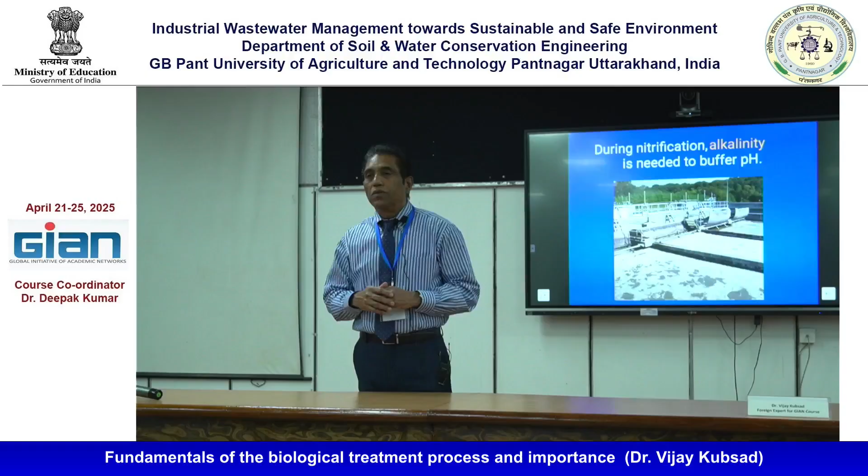If it is a non-point source, if it is storm water, if it is entering the environment and water quality river through the storm, non-point source, what you will do? It will all go to the river. If the clinical waste or any toxic waste is just thrown outside, where it will end up? Carcinogenic, even 1 ml 2 ml. That's why any waste which is coming from the clinics, it has to be incinerated, highly toxic. So it is not the question how much concentration. It is not like that everything should look big, but minor concentrations are very dangerous.

So that is why in the fisheries, what happened? They enter the aquatic system. Yes, from water, it is by the fishes through gills. They intake the water which contains the chemicals, and they get stored in the fish muscles. And then when the fishermen do the fishing, and they are used for human consumption, it reaches humans, and they are carcinogenic. This is how they enter the food chain. If you are just throwing on the soil, and many people here are from the soil department, you see, it enters the food chain through that also.

So listen. Some of these contaminants are carcinogenic. You just can't get rid of them. However small, they enter the food chain. And in the body, you see the concentrations I had given earlier, how small it is. It will all end up in the food chain, in the environment. So these are some of the things you will have to take care of, however small the concentration is. You understood the importance of biological systems, what are the components in the biological systems, how you will have to take care.